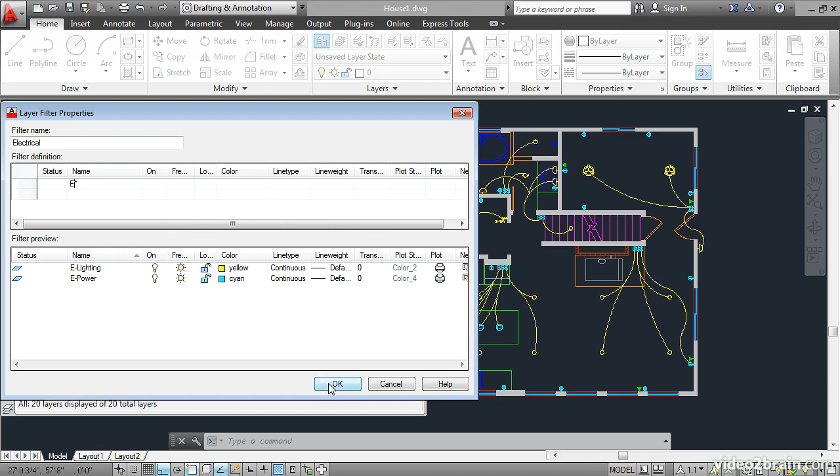Let's call this filter Electrical. Click in the name area here and type capital letter E. This filters the layer list to display only the layers belonging to the electrical discipline. Click OK, and the filter shows you the list. Click on All to see all of the layers again.

Let's create a different type of filter. Right here, you can create a new group filter. Click the button and then press Enter. We will just accept the default name Group Filter 1, and right now there's nothing in it. Click on All, and then let's drag specific layers into the Group Filter 1.

Drag in A doors, A poche. Poche refers to the shading inside the walls. And then scroll down and drag in the electrical layers and the D communication layer. Then click on the group filter. So it receives only the layers that you drag into it.

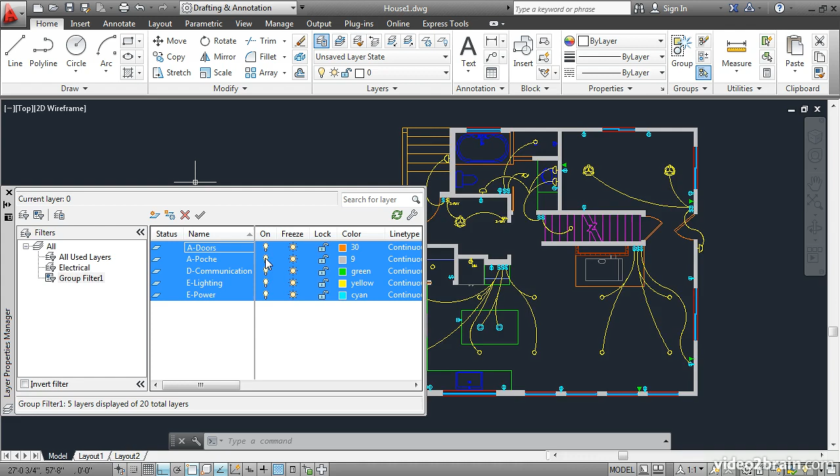I'll select all of these layers by clicking on the first one, holding down the Shift key, and clicking on the last one. Then I'll turn them off by clicking any one of the layer's light bulb icons. Click on All to display all of the layers. You can also sort the layer list by clicking on these headers. I'll click once and then again to sort the list in opposite order, and you can see all the layers that are off are now at the top of the list.

Every drawing has a layer 0. This is created by default. Drawings can also have another system layer called Defpoints, and this is generated when you add a dimension object. I'll scroll back up and notice that this one layer has a green checkbox next to it. That indicates the current layer, and you can only have one current layer at any given time.

I'll double-click on A header right here to set it current. It also says that right up here, current layer A header. I'll go ahead and draw a line over here in this door opening, and it will be on the A header layer. It's white right now because layer A header is white.

I'll click on the color swatch to open the color picker, and I'll select a color. I'll choose a green up here. Colors have swatches, and they also have numbers here. This is color 94. In AutoCAD, color is used merely to differentiate objects on screen. It has a different role than in a program such as Photoshop, where you're representing continuous tone.

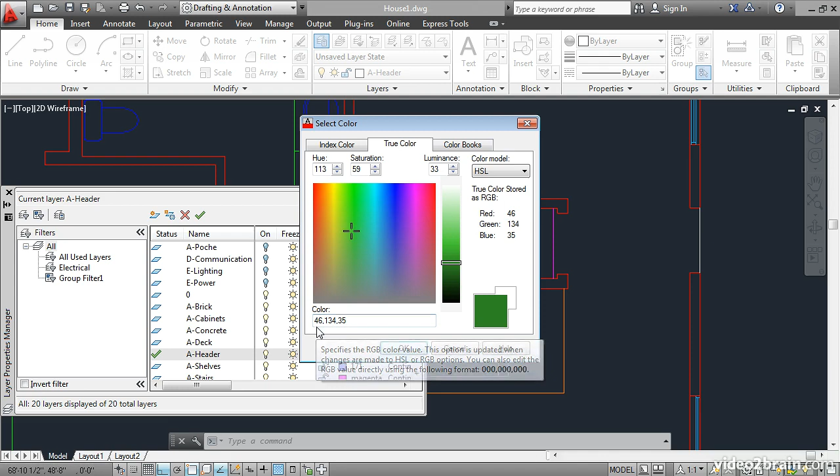However, you can select true color if you wish from this color ramp. You can drag the crosshair around to select a specific hue and saturation level, and you can also drag this slider to set the amount of luminance. If you do this, your color will have 3 numbers representing the red, green, and blue components.

I'll click OK. And you see here, I can expand this by dragging it, and you can see the color number listed here. This is a true color, and these other numbers that are just single numbers, those are AutoCAD color index colors. I'll just go ahead and draw in the other header lines with the line tool.

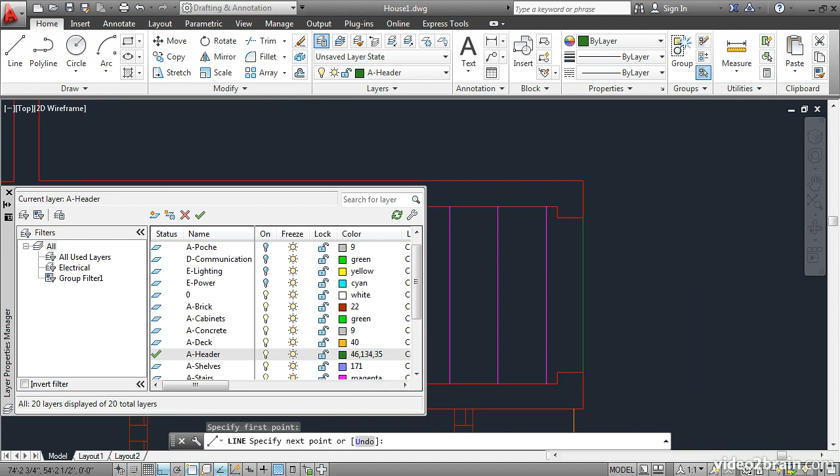I'll press Enter, Enter to end and restart the line command each time I need it. And then over here we have some other headers that we need. Again, headers are the part of the wall above a door or opening.

Now watch what happens if I turn off this layer. I'll get a warning saying the current layer will be turned off, and asking what I want to do. If we turn off the current layer, we have a potentially dangerous situation, because I could draw another line here, but it would be invisible since it's on a layer that's off. So you should avoid this practice. Instead, I'll turn that layer back on and set a different layer current.

I'll double-click on layer 0, for example, and then toggle off A-header. If I were to draw an object, such as a line, I would see it because it's on layer 0. I'll turn A-header back on and then erase these stray lines.

Layers can also be frozen. If I freeze a layer, it likewise hides it on the screen. The main difference between turning a layer off and freezing it has to do with regeneration. I'll zoom out a bit and demonstrate that for you.

I'll make A-header current, draw a line that extends up above the plan some arbitrary distance, and then I'll zoom extents. Then I'll turn this layer off—to do that I'll set layer 0 current, turn off A-header, and then zoom extents again by double-clicking the mouse wheel. It's the same view; AutoCAD is still considering that line when it does a zoom extents.

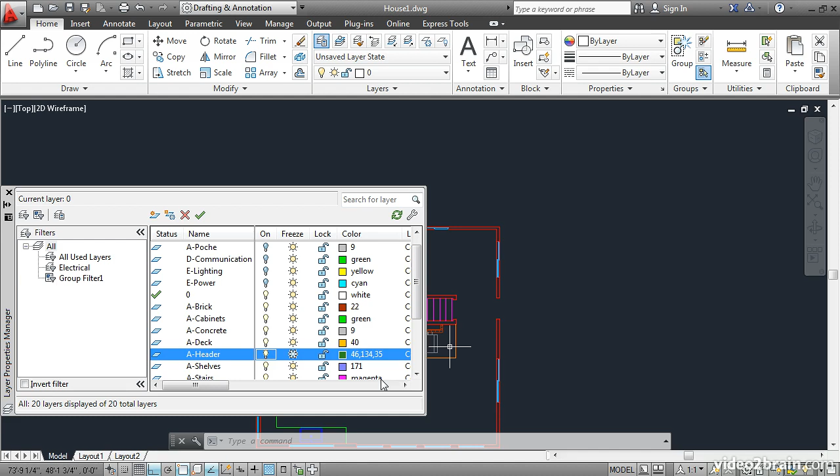However, if I freeze the layer and turn it on, it's still invisible. But then if I do a zoom extents, AutoCAD is no longer considering that object. So that's really the main difference between turning something off and freezing it. I'll go ahead and thaw the layer and then erase this line.

You can also lock and unlock layers using these padlock icons. If I lock A-header, notice the color dims slightly. If I put the cursor over A-header, you'll see an icon appear that's a little padlock. This means it's locked and I can't do anything to it.

If I try to erase it and click on it, it will just say one was on a locked layer and won't let me select it. This isn't really a security feature, because I can come back here and unlock the layer and then erase it if I wanted to. Locking is more of a convenience to keep you from inadvertently deleting things you want to protect. Layers have other properties that you can access by scrolling over.

Here we have line type. I'll click on the word continuous here on the A-header layer and change the line type to Phantom 2. The style of the lines changes. Now this line doesn't actually have any breaks in it—it's still a single line object, but its representation uses the Phantom line type. I'll just change that back to continuous.

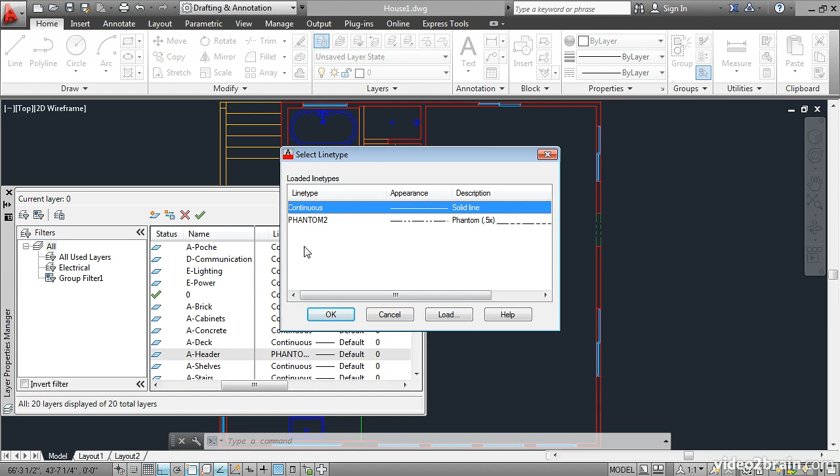You can also set the line weight, which refers to the thickness of the line here. Layers can have a value of transparency from 0 to 90%.

The plot style in this drawing is set to a color-dependent plot style, so the color number here is not editable—it merely represents whichever color I have selected. This is a true color, so it's giving me color 97 for some reason here in the plot style.

This is a plot toggle, so if you click here, you can make it so that this layer will not plot. This can actually drive you crazy if you're wondering why your plot doesn't have the headers on it—it might be that this flag is selected here in the Layer Properties Manager. I'll click it again to enable plotting for this particular layer.

There's also a new VP Freeze icon, which refers to freezing the layer in a viewport, which is in a layout. So to summarize, you have become acquainted with the Layer Properties Manager, have created a new layer, assigned it specific properties, created layer filters, and drawn on the current layer.